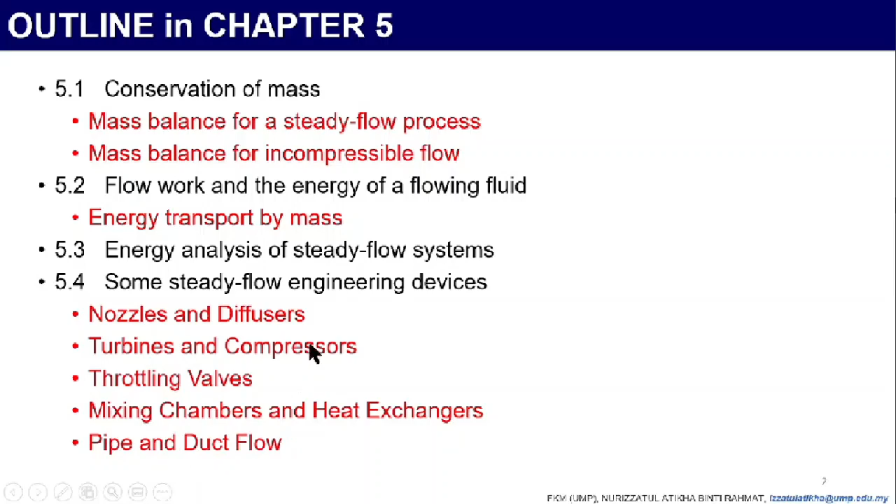In chapter 5, the objective is to develop the conservation of mass principle, and then apply the conservation of mass principle to various systems, including steady and unsteady flow control volumes. Control volumes means open system. Apply the first law of thermodynamics as the statement of the conservation of energy principle to control volume.

We will identify the energy carried by a fluid stream crossing a control surface as the sum of internal energy, flow work, kinetic energy, potential energy of the fluid, and relate the combination of the internal energy and the flow work to the property enthalpy.

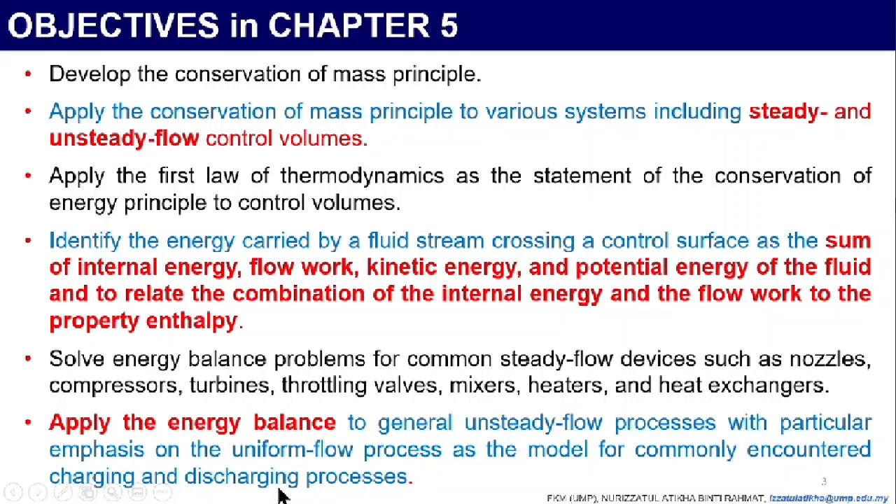We will solve energy balance problems for common steady flow devices such as nozzle, compressors, turbines, throttling valves, mixers, heaters, and heat exchangers. Last we will apply the energy balance to general unsteady flow process with particular emphasis on the uniform flow process as the model for commonly encountered charging and discharging processes.

Let's start our lecture on the conservation of mass. What is conservation of mass? You can see from this figure, 2 kilogram of hydrogen plus 16 kilogram of oxygen will result in 18 kilogram of water.

The conservation of mass principle is one of the most fundamental principles in nature. This is the example of conservation of mass: when 2 kilogram of hydrogen reacts with 16 kilogram of oxygen, 18 kilogram of water is formed. It is not 10 kilogram of water, or 16 minus 2, 14 kilogram of water. It should be 2 kilogram hydrogen plus 16 kilogram oxygen equal to 18 kilogram of water.

In the energy analysis of closed system that we learned in previous chapters, the conservation of mass principle is implicitly used by requiring the mass of the system remain constant during the process. Because in closed system, we understand that only energy can cross the system boundary. However, in open system or control volume, mass can cross the boundaries.

So we must keep track of the amount of mass entering and leaving the control volume. In this chapter 5, we have to understand that in order to calculate the total energy entering or leaving the system, and the total mass entering or leaving the open system, we have to calculate both, because these two can cross the system boundary. It is different from closed system where only energy can cross the system boundary.

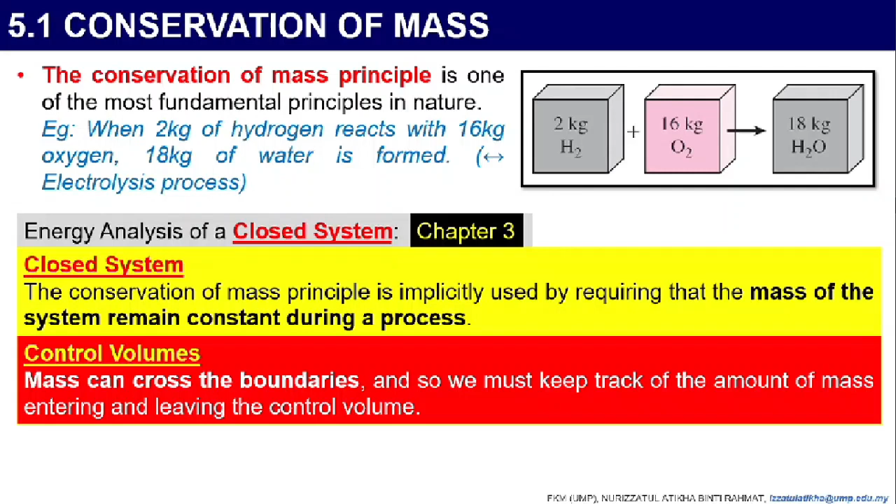Now, the conservation of mass principle for a control volume: the net mass transfer to or from a control volume during a time interval delta t is equal to the net change, increase or decrease, of the total mass within the control volume during delta t. It means total mass entering the control volume during delta T minus total mass leaving the control volume during delta T.

We have delta T at each of these mass terms, so it should be at the same delta t. Total mass entering and leaving should be known in order to calculate the net change of mass within the control volume. To simplify, it should be written like this: m in minus m out equals delta m control volume. So delta mcv equals m final minus m initial, the change in mass of the control volume during the process.

So we know, in order to calculate the change in mass delta M in a particular open system or control volume, we have to deduct the mass of the final result minus the mass of the initial mass.

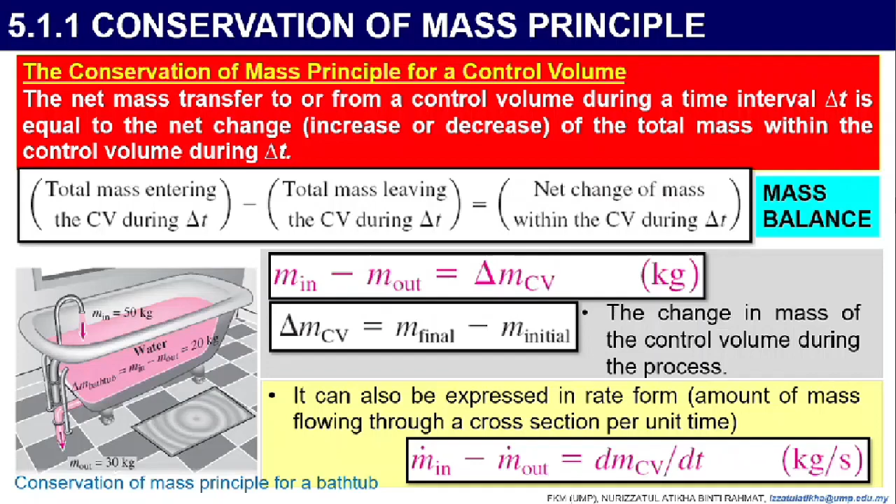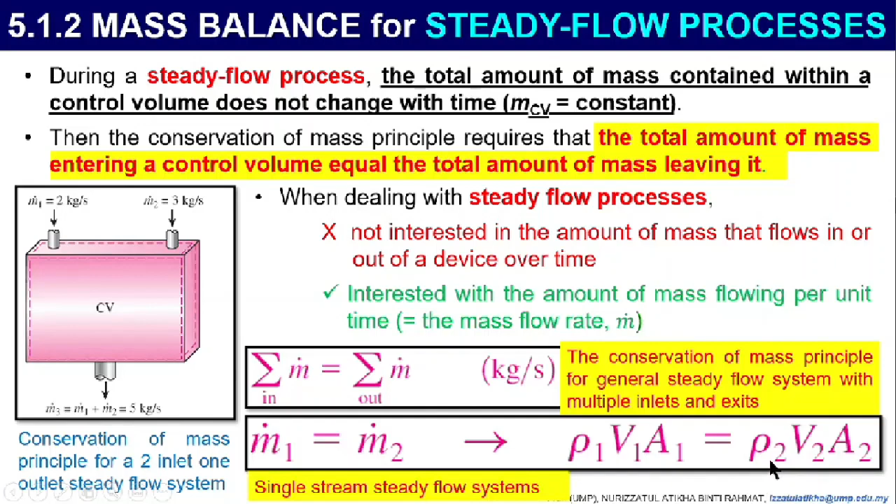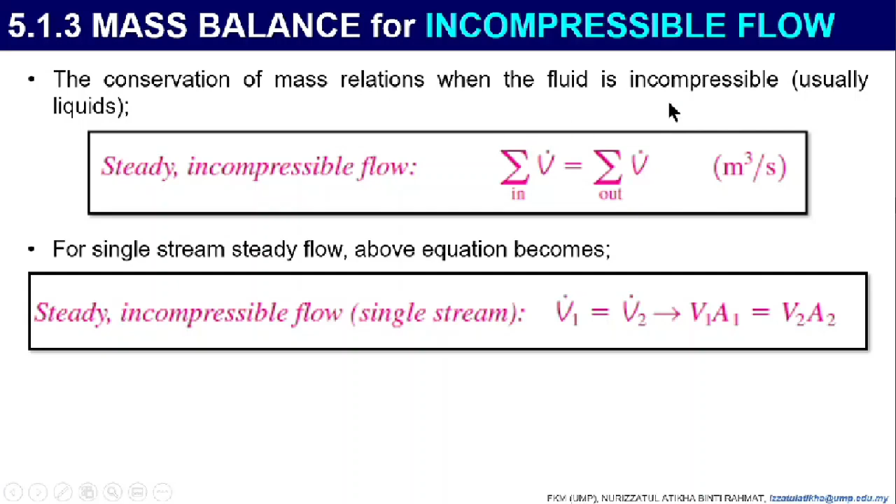Let's say rho 1 is 30, and rho 2 is also 30, then we can strike these out, so it becomes this equation: V1 dot equal to V2 dot, equal to V1 A1 equal to V2 A2. So no rho is in here - the density is constant because it is incompressible. So, incompressible means the density is constant, while steady flow process means the mass is constant.

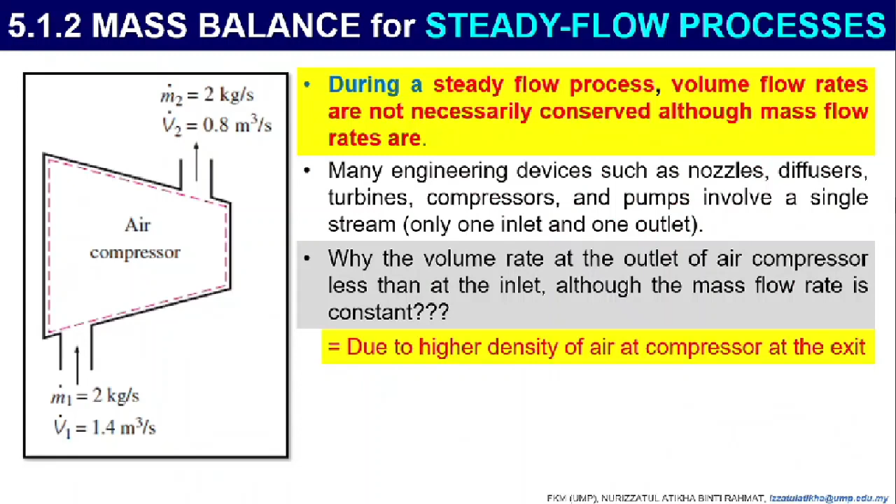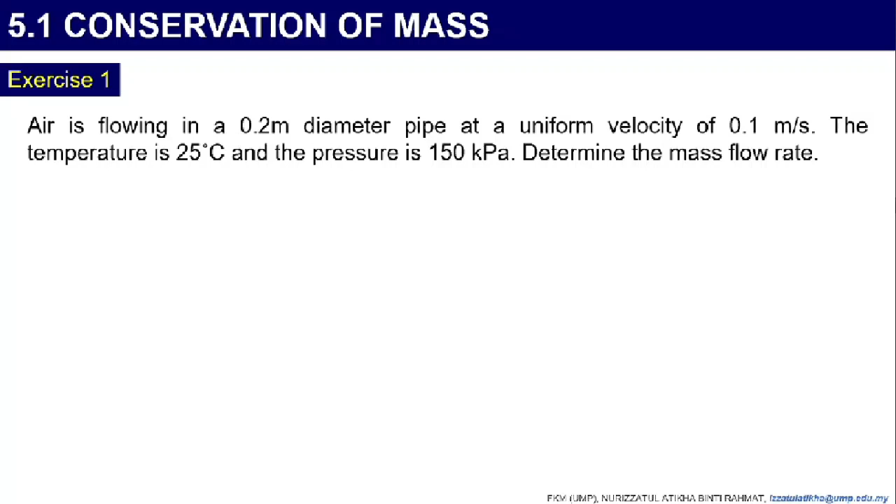Now I have an exercise for you here. Air is flowing in a 0.2 meter diameter pipe at a uniform velocity of 0.1 meter per second. The temperature is 25 degrees and the pressure is 150 kilopascal. Determine the mass flow rate. You can do this question and refer to this answer.

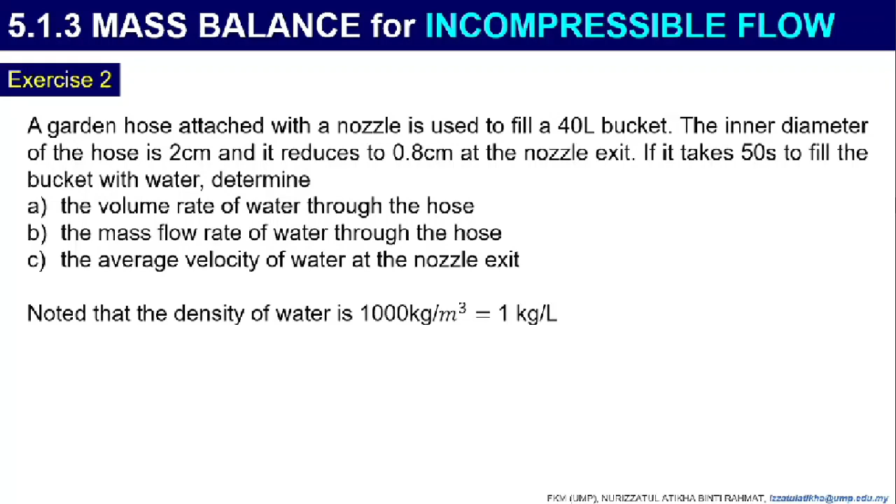Note that the density of water is 1000 kilogram per meter cubic, or 1 kilogram per liter. I have the answer here you can refer to, but please try to do it by yourself first.

Let's continue on 5.2, flow work and the energy of a flowing fluid. Unlike a closed system, where mass is fixed and only energy can cross the system boundary while volume is not fixed, a control volume or open system involves mass flow across its boundaries, and some work is required to push the mass into or out of the control volume. Since both mass and energy can cross the boundary in an open system, work is required to push the mass in or out.

For example, here is a schematic of flow work. We have an imaginary piston. In order to push this mass, we are required to apply some force F towards the piston, so that the piston moves to the right.

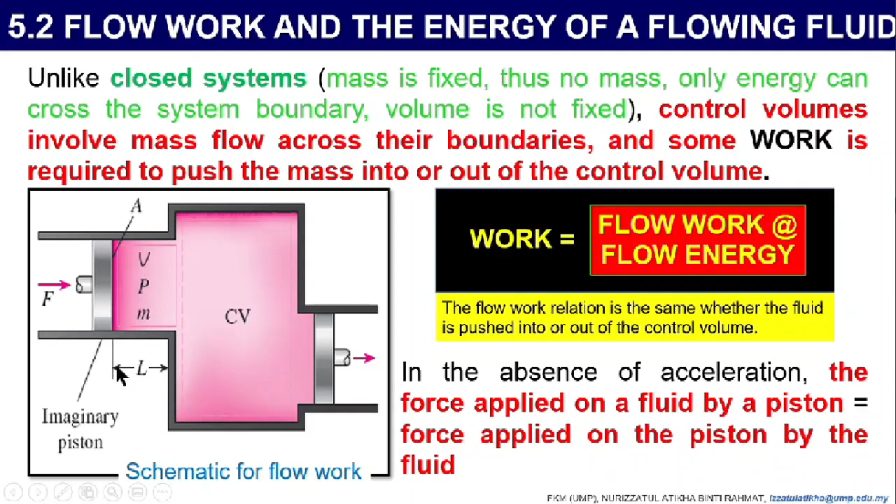In order to push this fluid element, we push it across a distance L. Thus, the work done in pushing the fluid element across the boundary is the W flow equal to F, the force used, times the distance L, which gives us PAL: P is pressure, A is area, and L is distance. Area times distance becomes volume, so W flow equals PV.

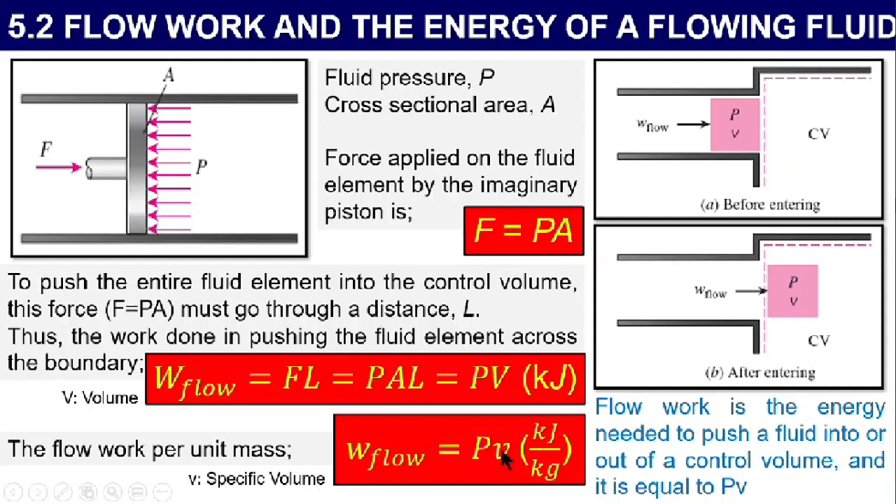This is actually the same as what we discussed in chapter 4 on moving boundary work, where WB equals P dV. So the flow work per unit mass, small w flow, equals P times specific volume, in kilojoule per kilogram. That is the flow work and the energy of a flowing fluid.

As a recap: total energy can be determined from two aspects, macroscopic and microscopic. In previous chapter 4, we learned about the energy balance equation for closed systems, where total energy can be determined from macroscopic and microscopic aspects. In macroscopic, we have potential energy and kinetic energy. In microscopic, we have internal energy, at the micro level.

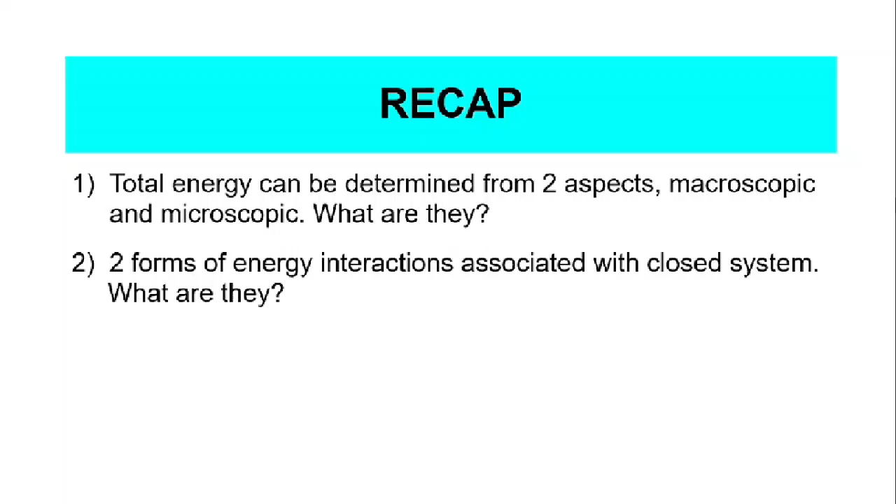Next, two forms of energy interaction associated with a closed system: heat transfer and work. This is how energy can be transferred into or out of a system. Then we write the energy balance equation for a closed system, which is very easy: Delta E equals E in minus E out.

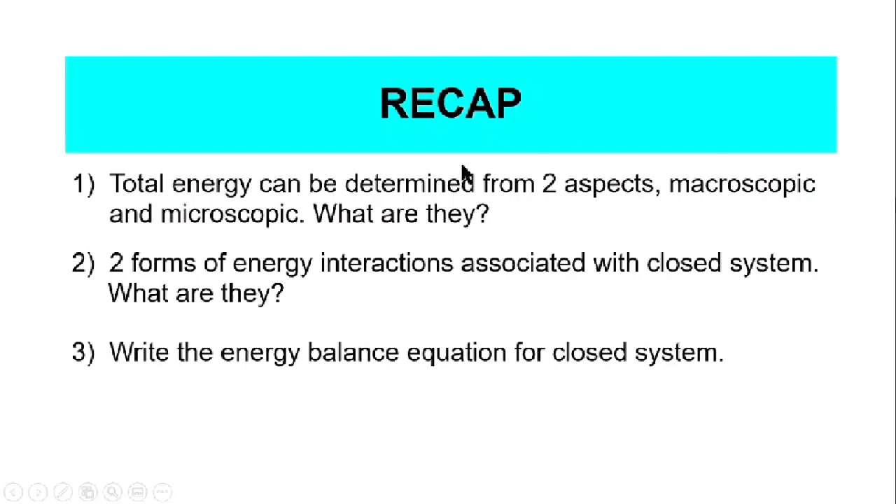So this is the answer for these three questions. First, macroscopic: we have kinetic energy and potential energy. Then microscopic, at the molecular level, we call it internal energy. The two forms of energy interaction associated with a closed system are heat transfer and work. Heat transfer only happens when the driving force is a temperature difference; it won't happen when there is no temperature difference, meaning the temperature of the system and the surroundings is the same.

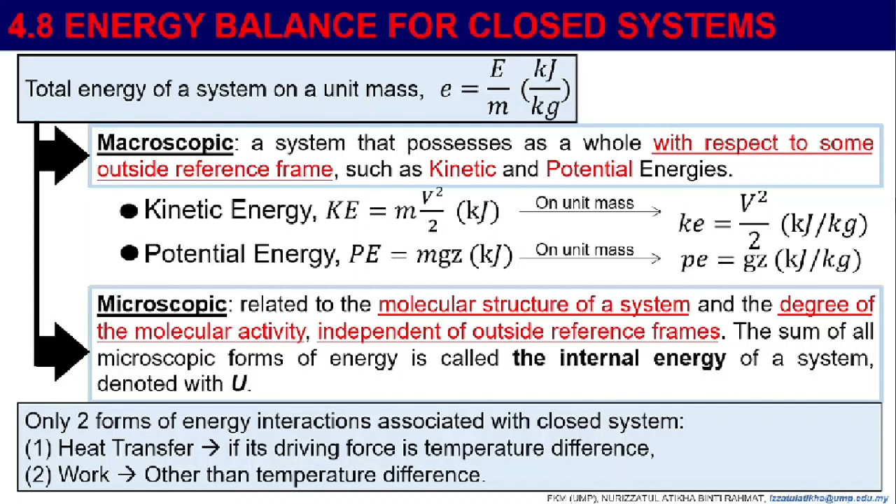Same temperature means no driving force, so it won't happen. It also won't happen when the system is adiabatic, meaning well insulated, so only a very small amount of energy can cross the system boundary. And then we have work other than temperature difference as the driving force.

So now this is the equation, the answer for the question just now. The energy balance for any system undergoing any process: delta E equal to E in minus E out. We can also rephrase this equation using heat, work, and total internal energy: internal energy plus delta KE (kinetic energy) plus delta potential energy. I already learned this in the previous video of chapter 4.

Q is 0 for adiabatic system. W is 0 where no work interaction happens in the system. And the mass energy, E mass, equal to 0 for closed system.

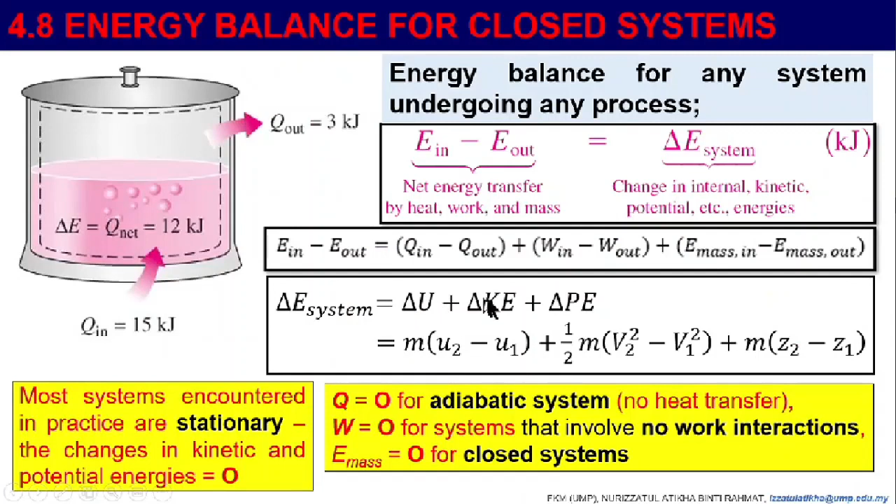Alright, so now let's see the total energy of a flowing fluid. The total energy of a simple compressible system, a non-flowing fluid, consists of three parts: internal, kinetic, and potential energies. On a unit mass basis, it is expressed the same way: internal, kinetic, and potential, but per unit mass. So we have internal energy, kinetic energy, and potential energy, all written in lowercase because it is per unit mass.

Then you have kilojoule per kilogram. The fluid entering or leaving a control volume possesses an additional form of energy, which we call flow energy: W flow equal to PV. Thus, the total energy of a flowing fluid on a unit mass basis can be expressed by including this additional form of energy. Then we get theta, the flow energy, equal to W flow plus E. So W flow equal plus with E, giving us PV plus U plus kinetic energy plus potential energy.

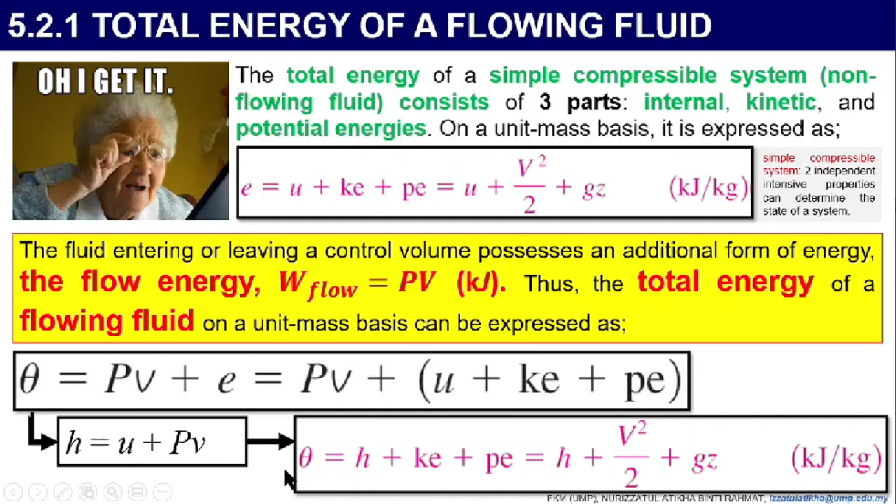So in a non-flowing fluid, we have a simple equation: internal, kinetic, and potential energies. However, in a flowing fluid, we have flow energy, W flow equal to PV, plus internal, plus kinetic, plus potential energy.

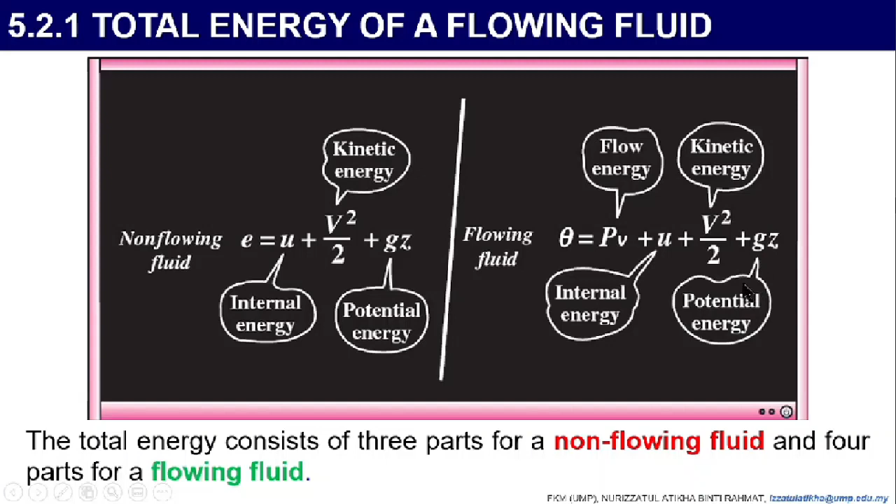So this is just the symbol for the equation I showed you. Total energy per unit mass of flowing fluid is represented by the theta symbol. Total energy of a flowing fluid with mass m is theta times mass, giving the same amount of energy transport, E mass. When a fluid stream with uniform properties is flowing at mass flow rate m dot, the rate of energy flow with that stream is m dot theta - same idea, just in rate terms.

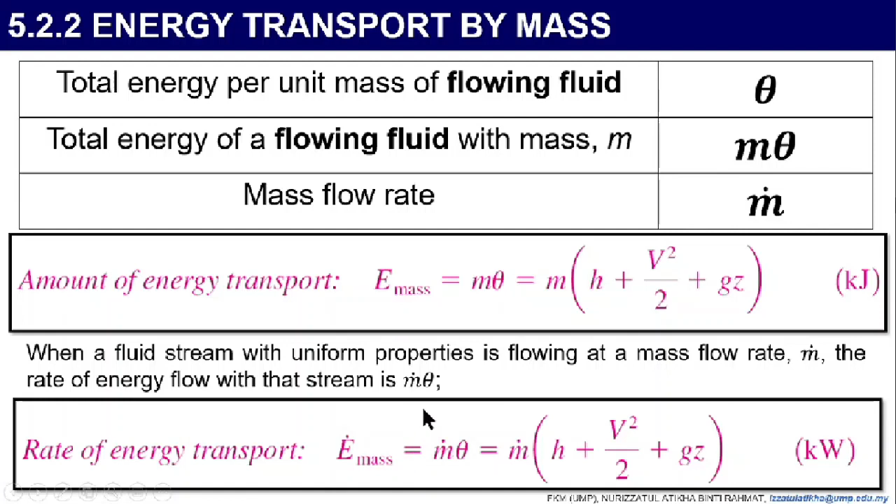The product m dot theta is the energy transported into the control volume by mass per unit time.

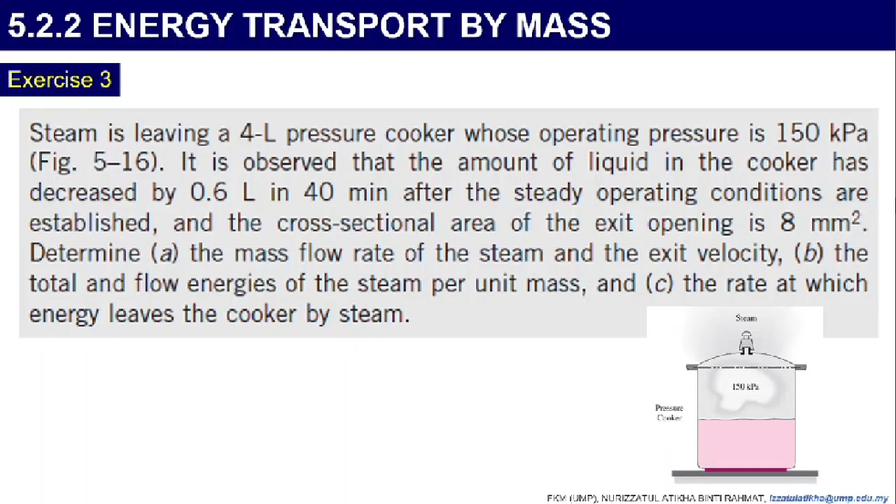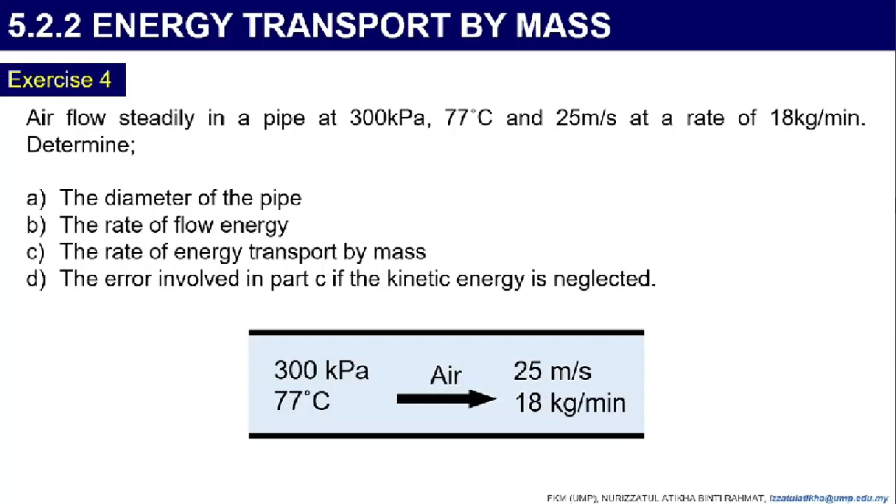I have a next exercise you can do by yourself, and refer to the answer below. Air flows steadily in a pipe at 300 kilopascal, 77 degrees, and 25 meters per second at a rate of 18 kilogram per minute. Determine the diameter of the pipe, the rate of flow energy, the rate of energy transport by mass, and the error involved in part C if the kinetic energy is neglected. Please do it, and we have some example answers here.

Alright, so now let's move on to the energy analysis of a steady flow system. We already know what a steady flow system is from before: a steady flow process is a process during which a fluid flows through a control volume steadily, so m1 dot equal to m2 dot. A large number of engineering devices operate for long periods under the same condition, thus classified as steady flow devices.

So we can classify it as a steady flow device or steady flow process. The fluid properties can change from point to point within the control volume, but at any point, they remain constant during the entire process. It can change position, but at any position, it remains constant.

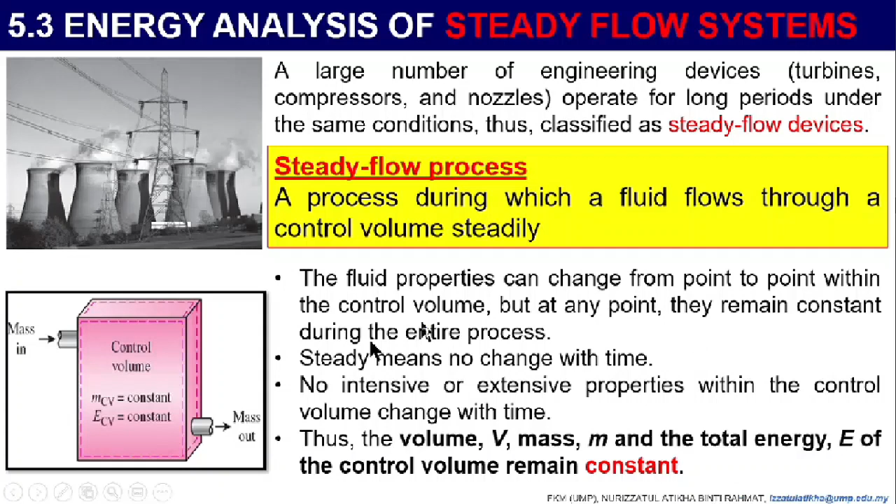So let's see, if you have the fluid properties at the control volume equal to 2 kilo, and after some time it changes position, it is still 2 kilo, it doesn't change. So steady means no change with time, no intensive or extensive properties within the control volume change with time. Thus, the volume V, mass M, and the total energy E of the control volume remain constant.

As a result, for steady flow systems, the boundary work equals 0 since V of the control volume is constant. And then we have the total mass and energy entering the control volume equal to the total mass and energy leaving it, since mass of control volume and energy of control volume are constant.

The mass balance for a general steady flow system: m dot in equals m dot out. We learned this already. And then the mass balance for a single stream, one inlet one outlet steady flow system is rho 1 V1 A1 equal to rho 2 V2 A2.

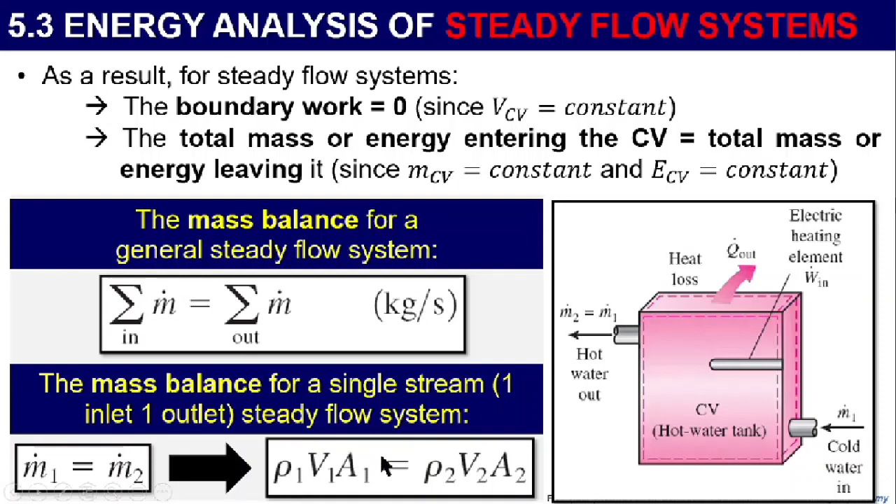During a steady flow process, the total energy content of a control volume remains constant, ECV equal to constant. Thus, the change in the total energy of the control volume equals 0. The amount of energy entering a control volume in all forms by heat, work, and mass is equal to the amount of energy leaving it. So this is the rate form of the general energy balance for steady flow process: E dot in minus E dot out equals delta E, and because this is constant, we have E dot in equal to E dot out.

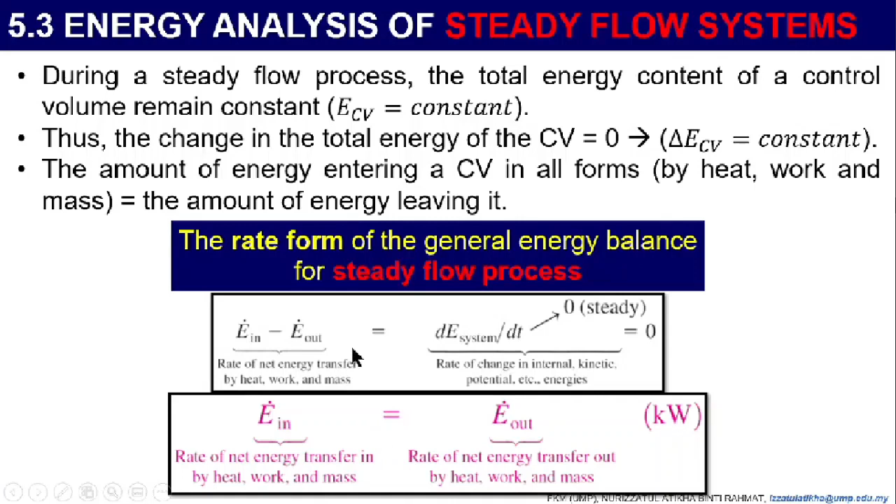So this is the total equation for steady flow system. We have heat here, work here, and also the total energy by mass. Here we have the kinetic, potential energy, and also internal energy. I already summarized it here, you can refer to this equation.

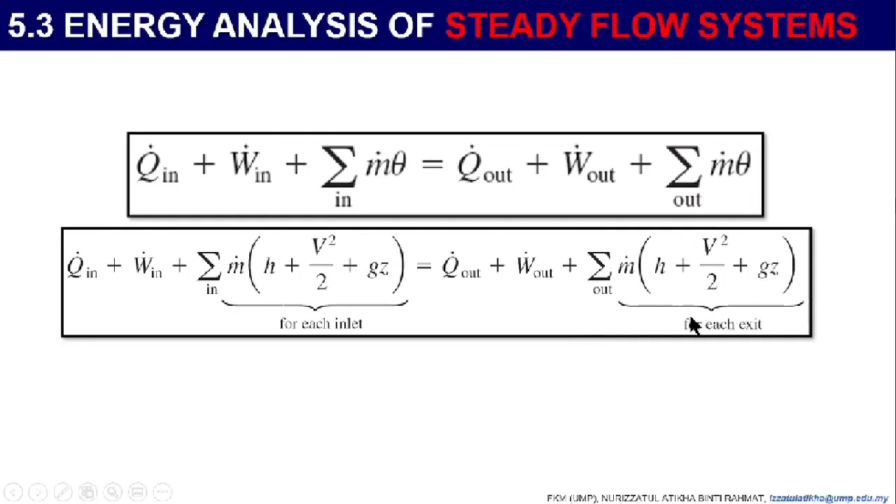So in equals out, it's the same as this one. In equal to out, same as this one. Heat plus work plus total energy by mass. That's why m dot times enthalpy plus kinetic plus potential energy equals the same terms but for out. So in equal to out.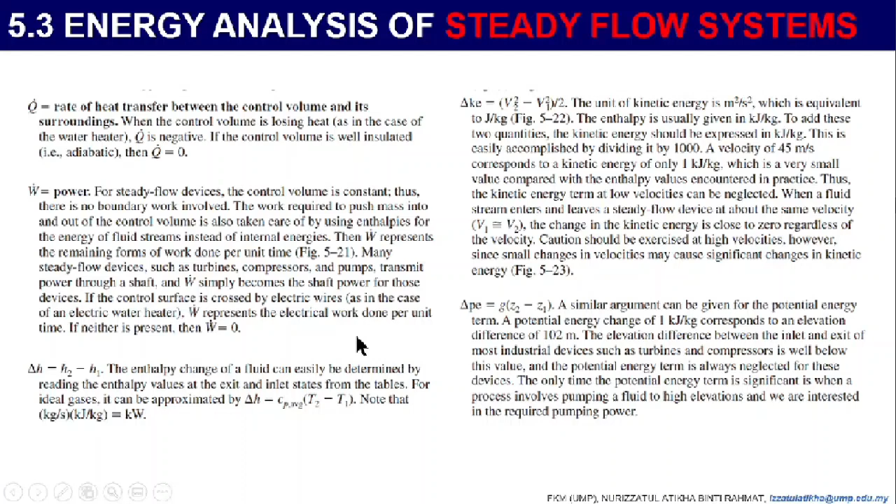So lastly, we will discuss some steady flow engineering devices. Many engineering devices operate essentially under the same conditions for long periods of time. The components of a steam power plant, for example, operate non-stop for months before the system is shut down for maintenance.

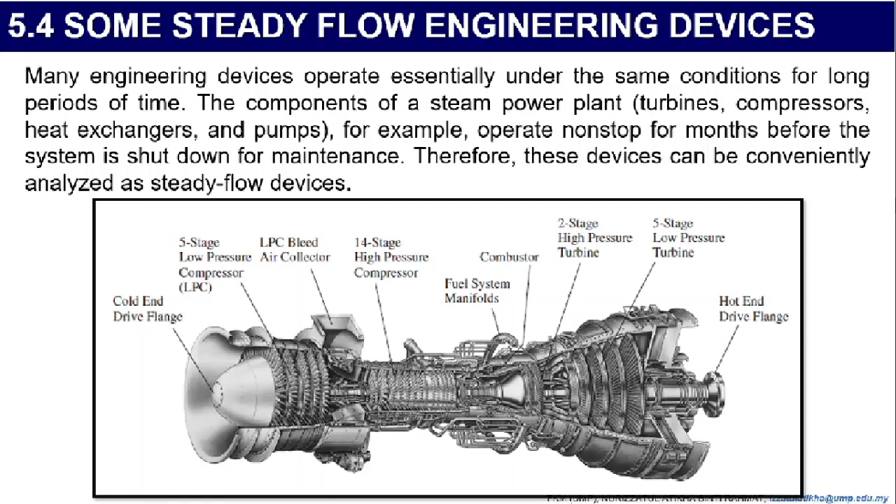So I think you guys are already familiar with this background, where the device is operated for long hours, up to months, and then at some point it will shut down for maintenance. So therefore these devices can be conveniently analyzed as steady flow devices, because they operate over very long terms of time. That's why it is called a steady flow device.

For example, we have nozzles and diffusers. Nozzles and diffusers are commonly utilized in jet engines, rockets, spacecraft, and even garden hoses. A nozzle is a device that increases the velocity of a fluid at the expense of pressure. A diffuser is a device that increases the pressure of a fluid by slowing it down.

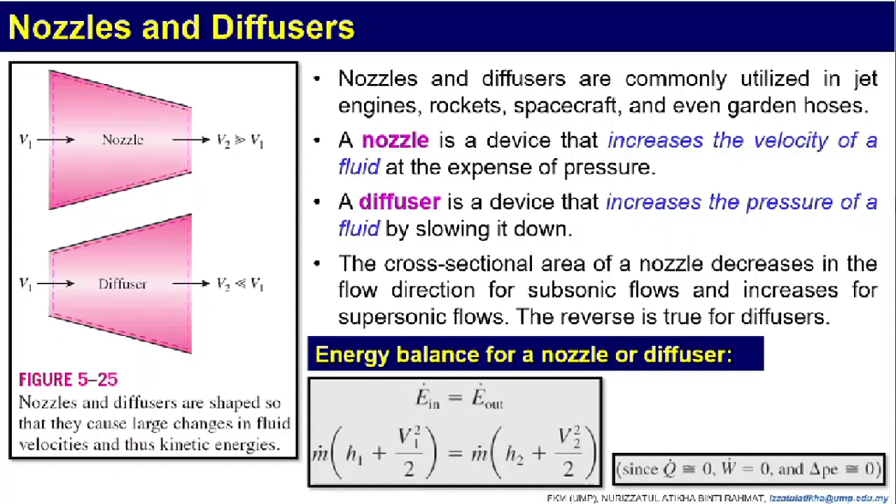So this is the energy balance for nozzle and diffuser. You can use this equation for nozzle and diffuser. If the question states that it is a nozzle and diffuser, you have to use this equation of energy balance. Okay, so I have another question for you.

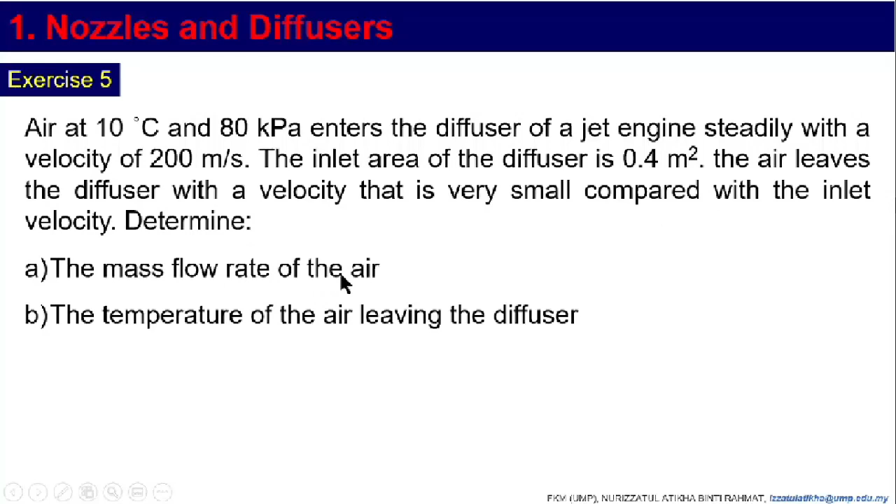Air at 10 degrees and 80 kilopascal enters the diffuser of a jet engine steadily with a velocity of 200 meters per second. The inlet area of the diffuser is 0.4 meters squared. The air leaves the diffuser with a velocity that is very small compared with the inlet velocity. Determine the mass flow rate of the air and also the temperature of the air leaving the diffuser. I already gave the answer here.

And then next we have turbines and compressors. We have turbines that drive the electric generator in steam, gas, or hydroelectric power plants.

As the fluid passes through the turbine, work is done against the blades, which are attached to the shaft. As a result, the shaft rotates and the turbine produces work.

Compressors, pumps, and fans are devices used to increase the pressure of a fluid. Work is supplied to these devices from an external source through a rotating shaft. A fan increases pressure and is mainly used to mobilize a gas. A compressor is capable of compressing the gas into a very high pressure, and pumps work much like a compressor, except that they handle liquids instead of gases.

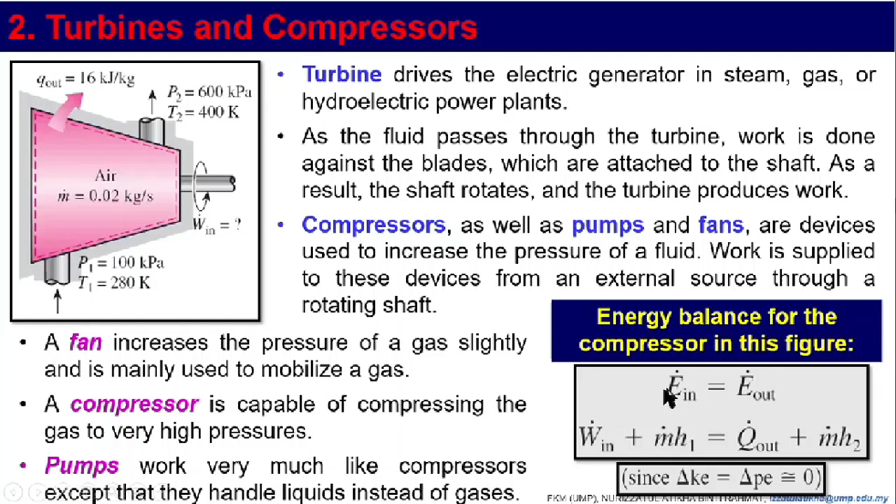So this is the energy balance equation for turbines and compressors. If the question states that it is for a turbine and compressor, you can straight away use this energy balance equation. Then we have throttling valves.

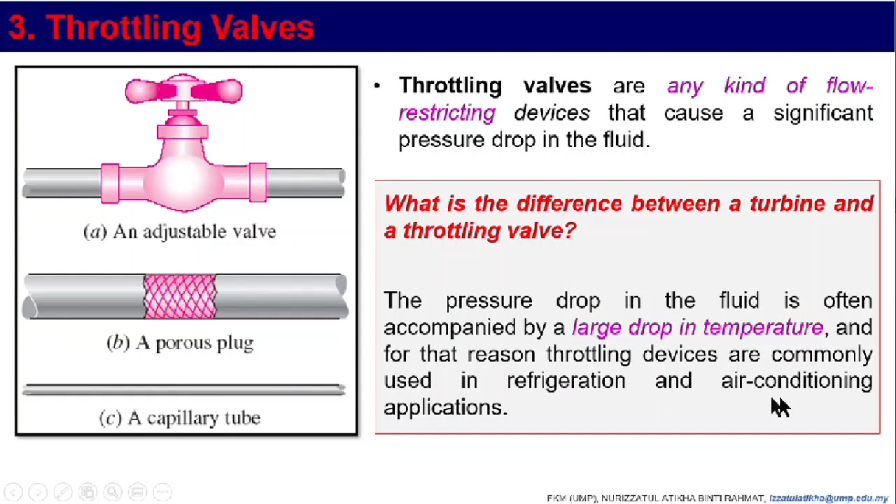Throttling valves, as shown in this figure, are flow-restricting devices that cause a significant pressure drop in the fluid. What is the difference between a turbine and a throttling valve? The pressure drop in the fluid is often accompanied by a large drop in temperature, and for that reason, throttling devices are commonly used in refrigeration and air conditioning applications.

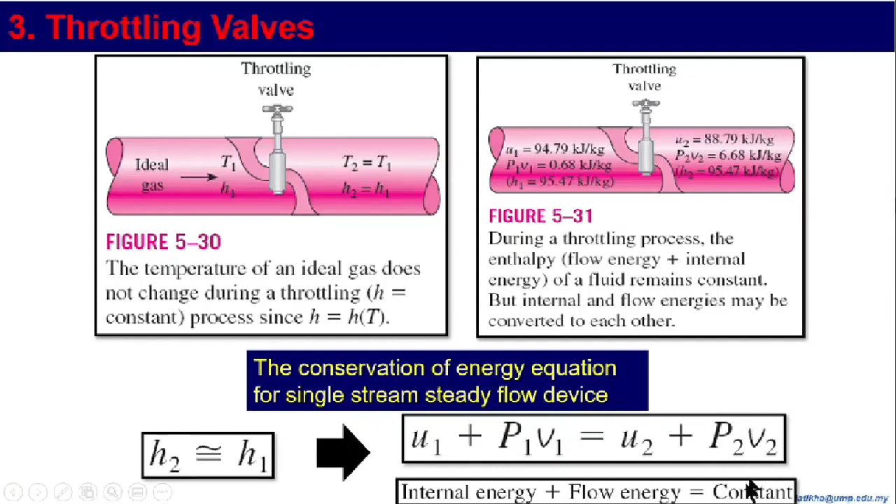So this is the equation for conservation of energy for throttling valves. You can refer to this equation: internal energy plus flow energy equal to constant. Then we have the mixing chamber.

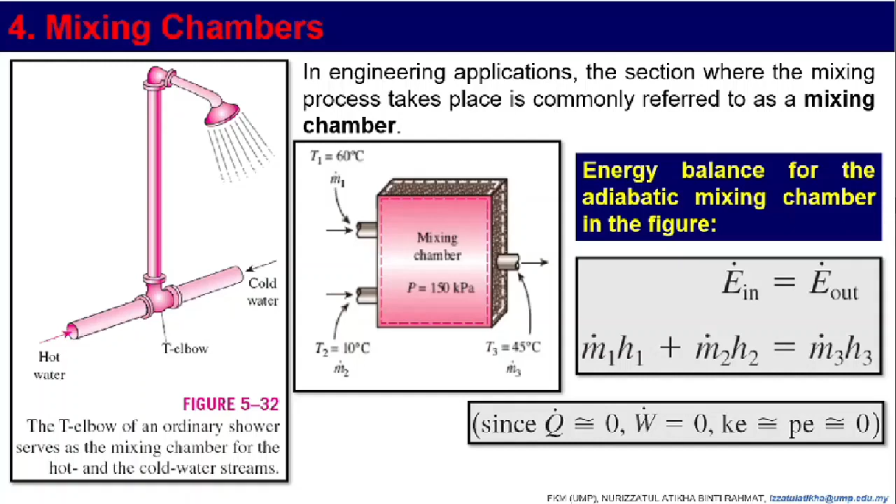So actually, guys, if the question already states some particular device for the steady flow process, you can straight away use this equation. You don't even have to analyze the equation from the start — you can just use it directly.

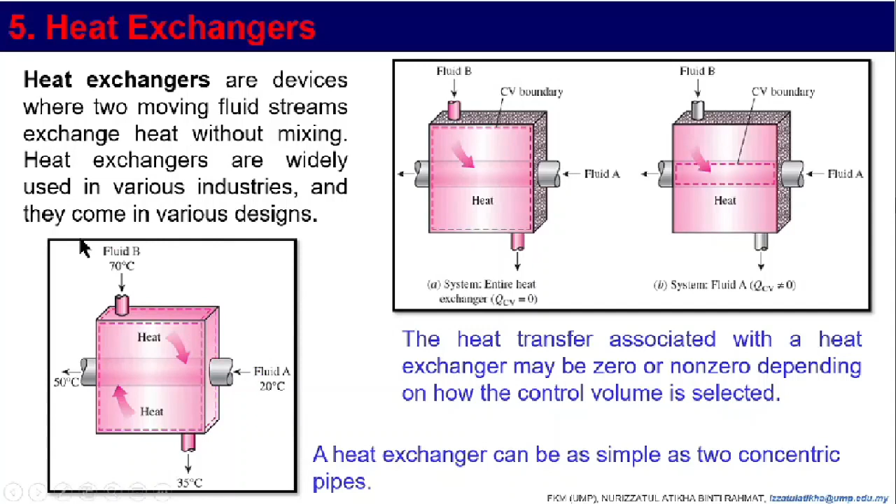And then we have heat exchangers, which are devices where two moving fluid streams exchange heat without mixing. Heat exchangers are widely used in various industries and come in various designs. This is the equation for a heat exchanger — mass and energy balance for the adiabatic heat exchanger shown in the figure. You can just straight away use this equation.

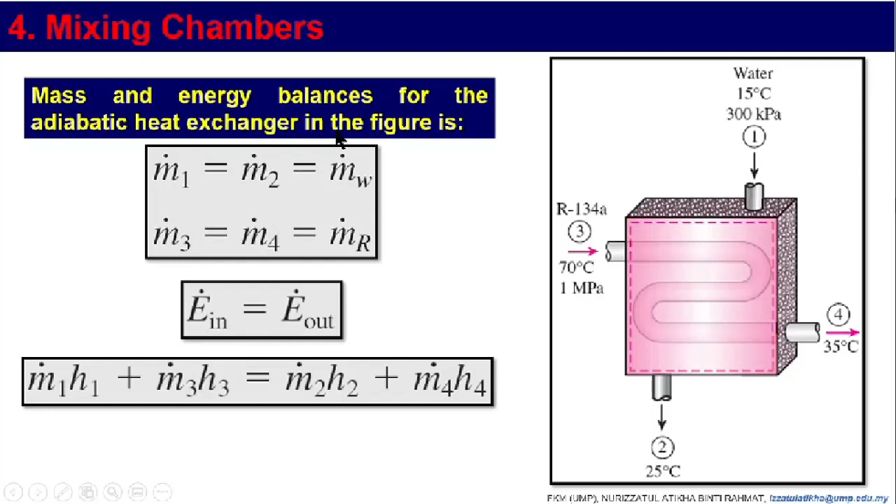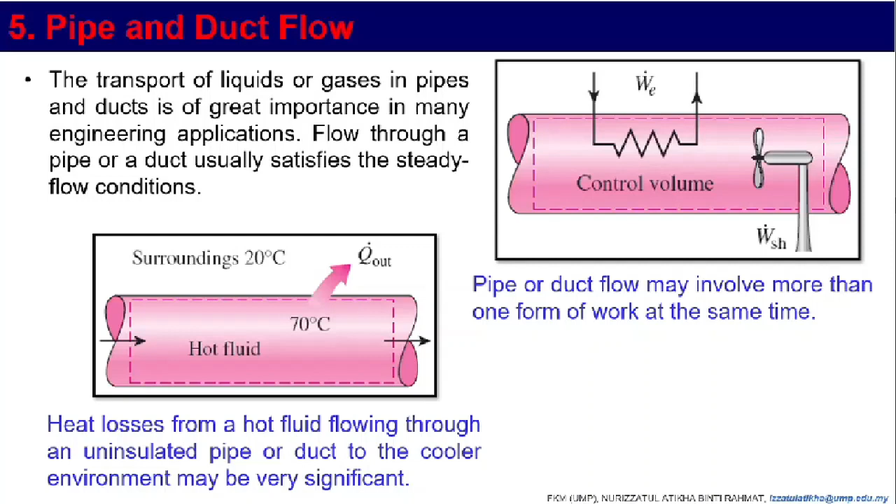So that will be all for chapter 5. In this chapter, as I already explained, we mainly focus on the conservation of energy and conservation of mass equations for a control volume, for an open system. In chapter 4, we learned the energy balance equation for a closed system.

Because only energy can cross the boundary in a closed system, it is different from an open system, where both mass and energy can cross the boundary. Hence we learned the energy balance equations and also the mass balance equation for this control volume.

In addition, we not only learned the energy and mass balance equations for a control volume, for an open system, but also what happens to the equations for a steady flow process or an incompressible flow, as we learned in this chapter. The equation is different depending on which process and which flow. If it's steady flow, it's like this; if it's incompressible flow, the equation becomes like this. So it's different. Okay guys, we have finished chapter 5.